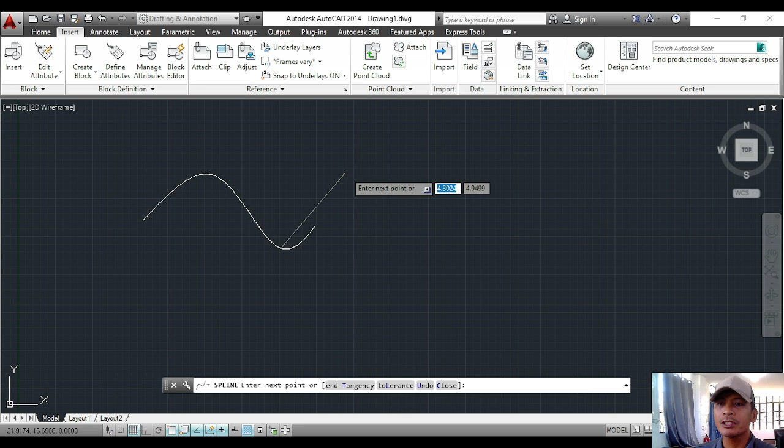Then move our cursor using our mouse, left click button, then again going a little down to our X axis, click, left click button, then bring our mouse again, left click button, then once again going down a little, left click button, then press enter or spacebar. That was our created spline in AutoCAD.

Another example, we will use the Y-axis to represent our spline. For example, I will start here. Again, type SPL in our keyboard, then press enter or spacebar. Then using our mouse...

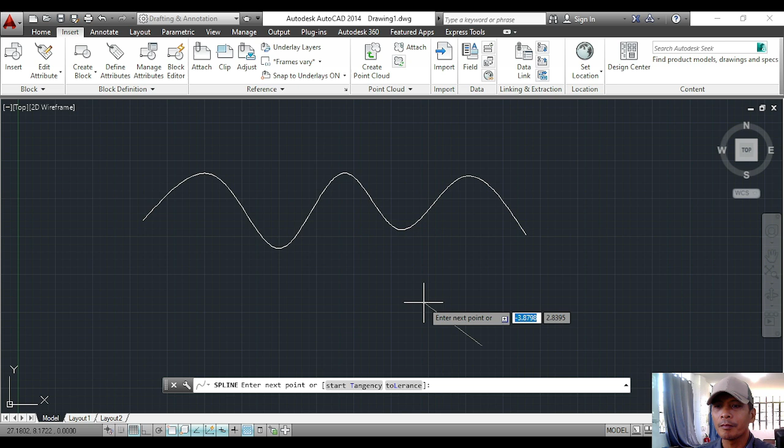Specify the first point. Left click button of our mouse, then again drag, going to the left, left click button, then again a little up, left click button, again left click button, then until here, left click button, and press enter or spacebar. So that was our created spline in AutoCAD.

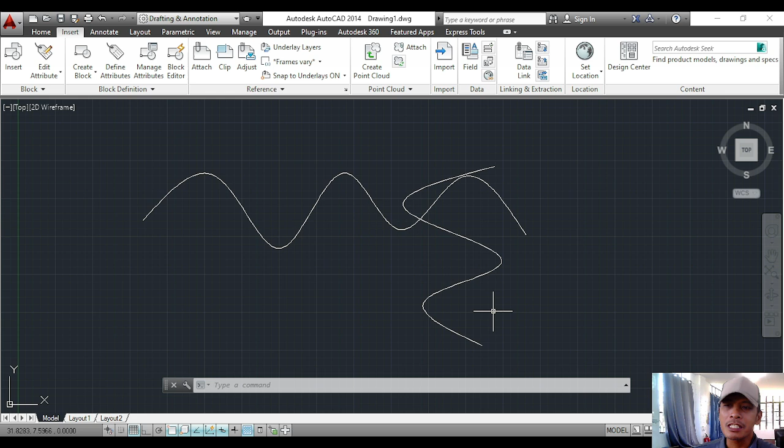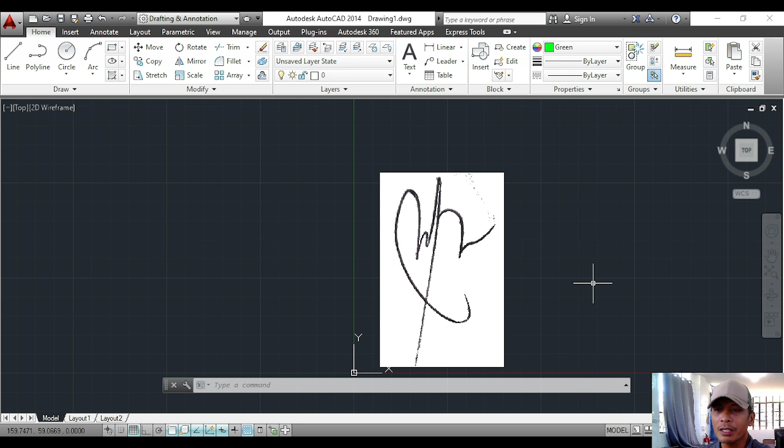Now we will go to the use of the spline tool in AutoCAD. The spline tool can be used for rastering an image. For example, I have a signature here and I want to copy this one to use for my e-signature. So the spline tool can raster an image. For example, I want to raster an image using the spline command.

I will type SPL in my keyboard. Then, for example, I will start from here. Make sure that the color you are going to use is visible.

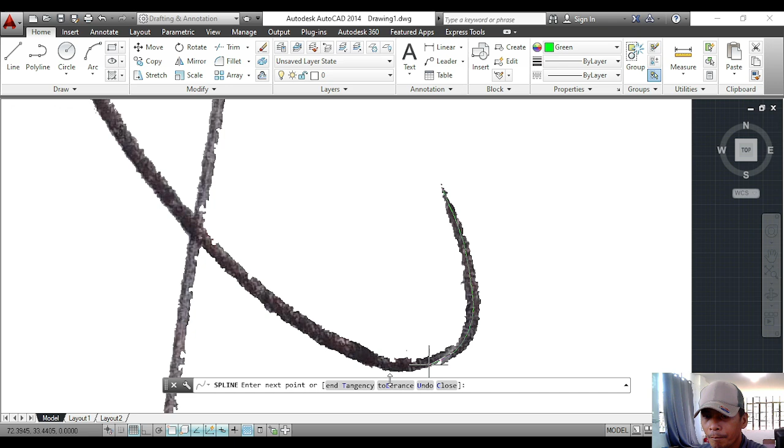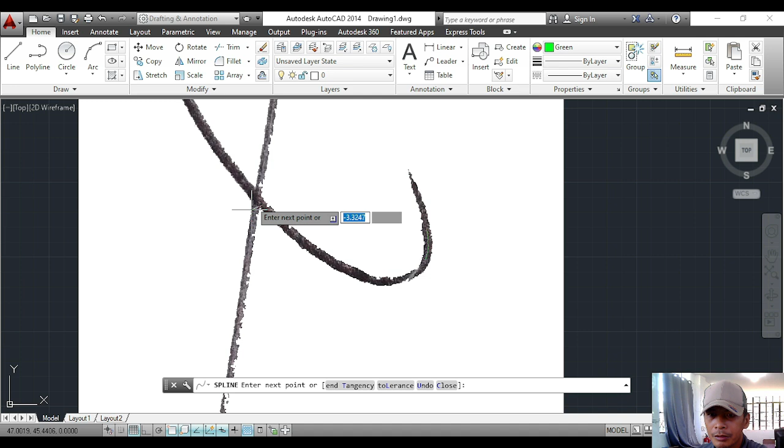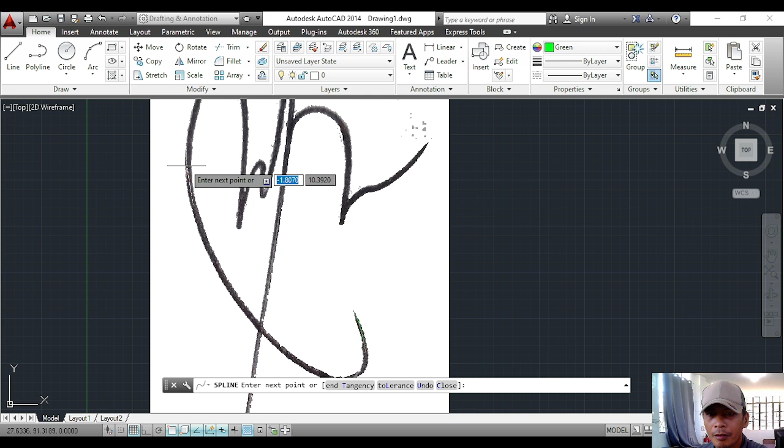Okay, just click. Left click button. Left click button. Left click button. Then straight until here. Okay, left click. Then until here. Again left click button. Again. Then until here. Till there.

I want to click here. Then here. Until here, left click button. Again, left click, then straight until here. Then from here to here, then a little going down.

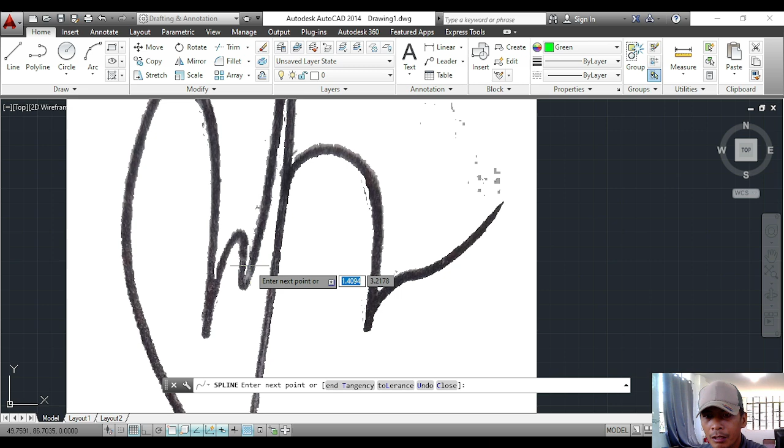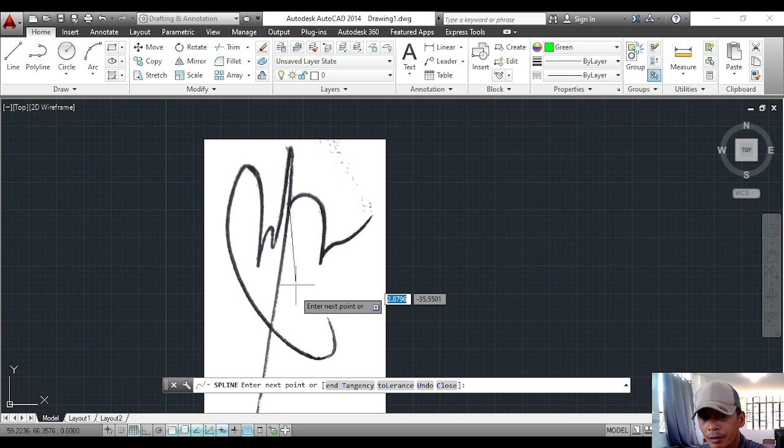Okay, then a little up, left click button, left click, click, left click, then straight until here, then going down here, till here, and then going down until here. For example, it's here. Then I'm going to stop it here, press enter or spacebar.

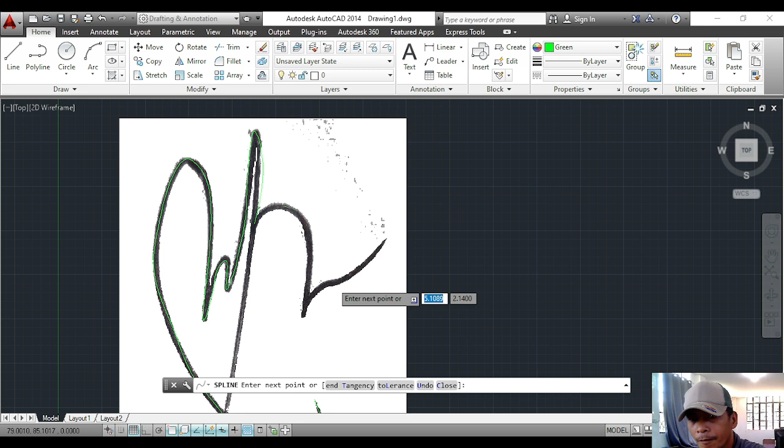Then I will continue for this part. I will continue on this part. Okay, then here, left click button, left click, and until here, till here. Okay, then here. Then I'm going to end it here on this part. Okay, then press enter or spacebar.

Now the next step will be to detach the image. This one. Delete. Then this is the traced image that I've created using the spline command in AutoCAD.